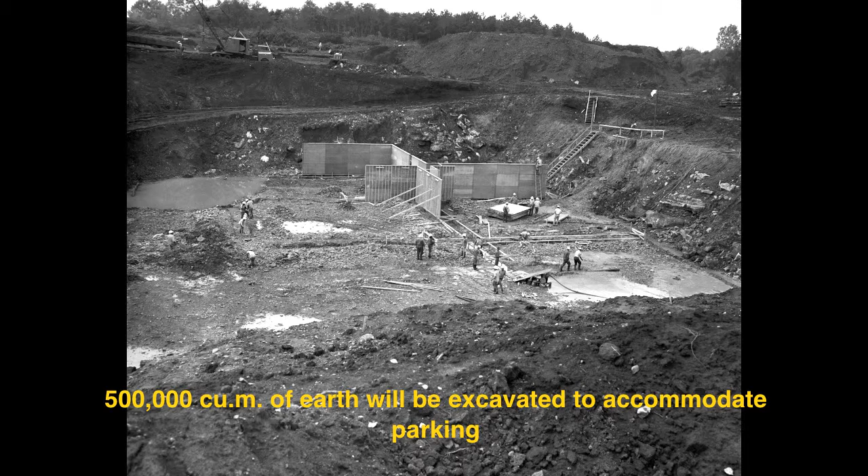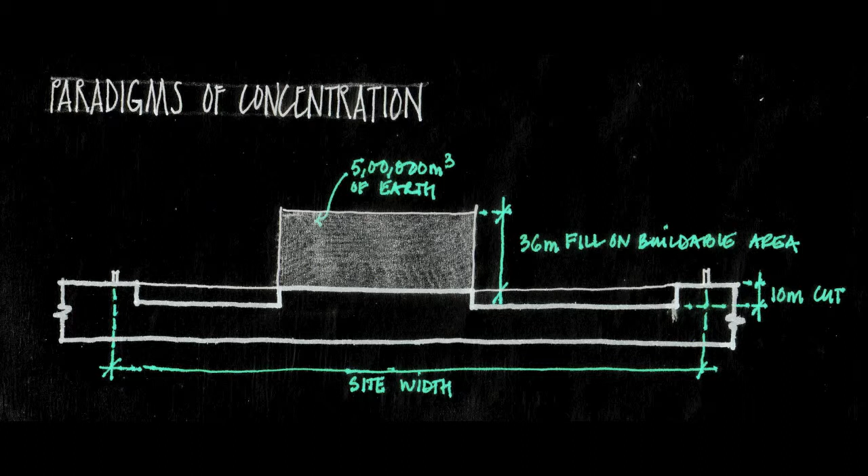Real when we consider the 500,000 cubic meters of Earth that will be excavated to accommodate parking. This quantum of Earth, when translated into the buildable site, would be equivalent to a 12-story building. An environmentally sensitive approach must then start with the question: what should be done with this Earth?

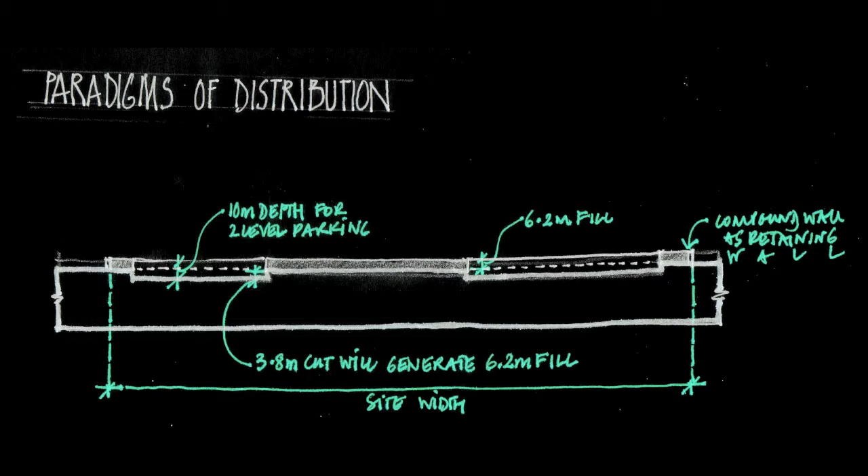In most cases, out of sight is out of mind, an attitude which at larger scales is environmentally catastrophic. We suggest a humble alternative: the common sense equalizing of cut and fill. We suggest the second, less aggressive way, where the rules of gravity dictate and bring things down to appropriate size and scale towards the Earth. This, in general, is our attitude to the environment: to address serious issues with simplicity.

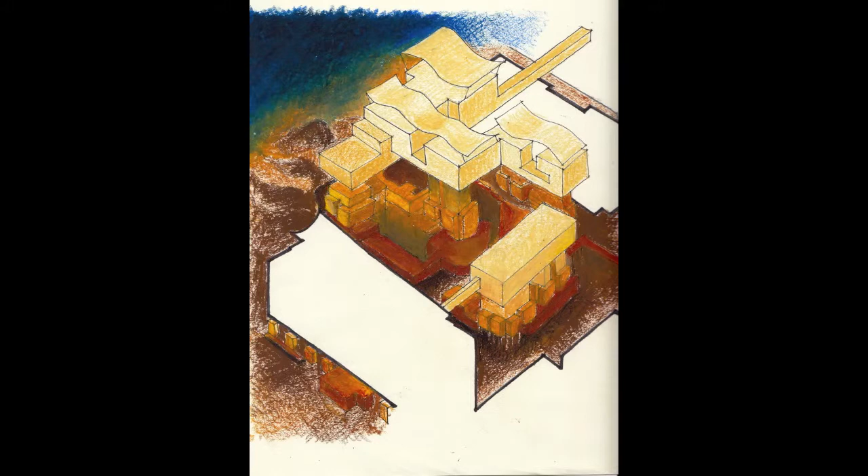If the Earth is the physical datum of the environment, then ground is its social aspect. The project worked with the idea of many grounds that are both continuous and articulate the potential for places of individual character. Earth ground, dense ground, density.

At 15 to 20,000 people on a site of 8.5 hectares, we are dealing with an extrapolated density, 16 times the average density of Delhi and 6 times the density of its densest parts.

Density is seen as potential. It is the potential of human interaction. Density: the number of human interactions per unit area, per unit time.

Indian architecture has had two metaphors for the spatiality of density: the cave and the forest. The built environment has been articulated as the spread of a porous fabric to be inhabited.

The small grain functions occupy the ground and are positioned to allow for programmatic permeability across the site as a whole. The fabric connects disparate functions, not making a distinction between the existing and proposed buildings.

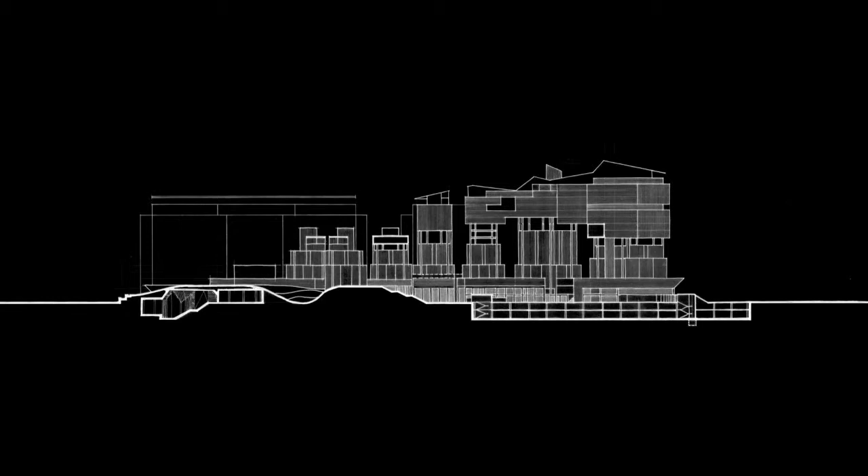As one moves upwards, the grain grows larger. The fabric gives way to building objects composed in space. There is a corresponding spatial change from the hapticity of the labyrinthine to the visual space of objects.

There is a structural advantage in placing the small-scale functions on the ground. Span bays are smallest at the bottom and merge to larger and larger spans as the building rises.

Structure is seen as an armature of relationships. Vertically, the relationship of small to big, heavy to light, and earth to sky. Horizontally, the relationship between open and closed, public and private.

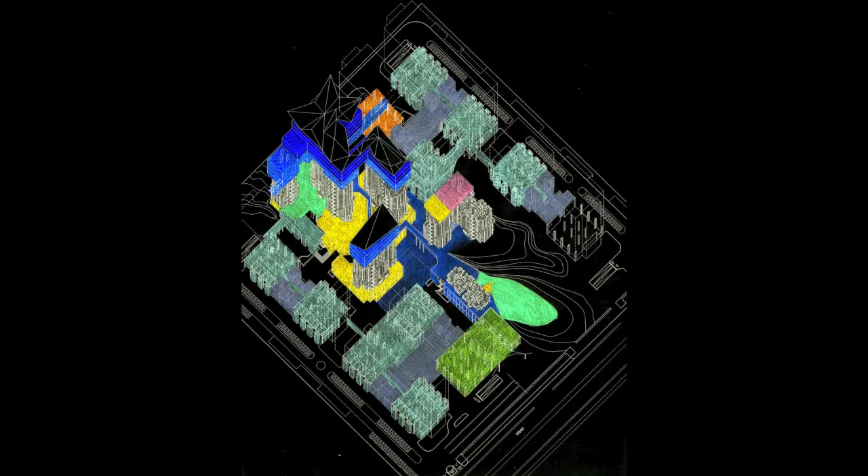The proposed project works with an open system of program. Functions are sometimes overlaid, sometimes spread across the boundaries of buildings. The hotel, for example, is seen as part of the habitation and is spread horizontally under the existing buildings, connecting the commercial and residential with other functions while lending its own facilities for common usage.

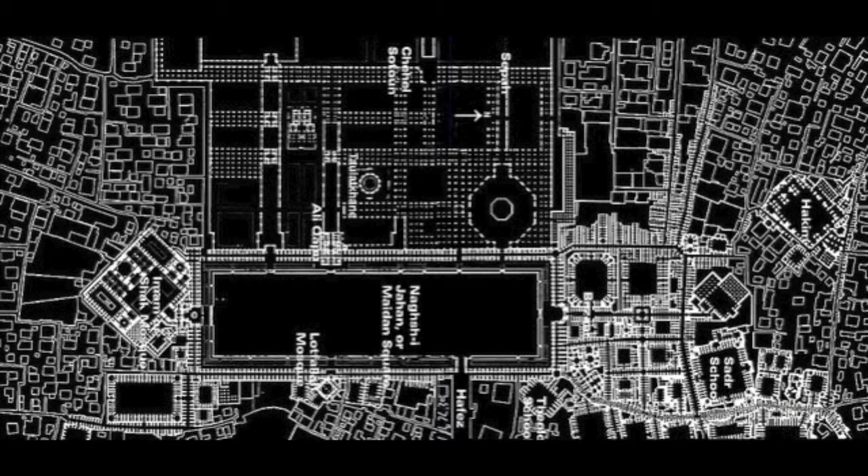Forms collide to create spatial redundancies, which are not in search of neat functional resolution, but in search of the potentialities of inhabitation by the vitality of life.